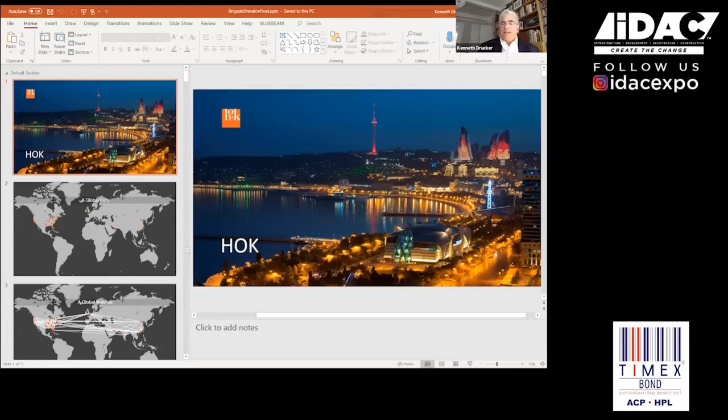So I've been traveling to India on and off for approximately 15 to 20 years, and it's been a fascinating experience for me in terms of understanding the culture. I love going to India, I love the smells, the fabric, the people, the textures of the cities, and creating architecture there. What's really fascinating to me is how the technology really hasn't caught up to what I would say other world-class countries have. So it's been very frustrating as a designer, because we have to actually design to what we think can be built in India.

Well, thank you very much for having me. I'm delighted to participate in this discussion about facades in India. I've been traveling to India for almost two decades, and I'm quite passionate about coming to the country. I love the people, the projects, the smells and the textiles, the sense of urbanity, and I find it a very friendly place to practice architecture. My relationship with India started with Jai Shankar at the Brigade Group, and since then I've been working with Hines, with the Chatterjee Group, with Adani, some projects with JP before they had those issues in Noida, and lots of different building types. We've been active in the transportation sector, and in residential, commercial, and retail in India for over 30 years.

So I'm going to share a presentation that briefly describes some of our projects in India, a great country, and then focus primarily on the Brigade project. Does that sound good?

Yeah, perfect, sounds great. So HOK has been around since 1955, and we're basically a virtual company at this point. I lead the practice in the New York studio, and we basically follow our clients all over the world. Right now our work in India is done primarily out of our London, New York, and Hong Kong offices.

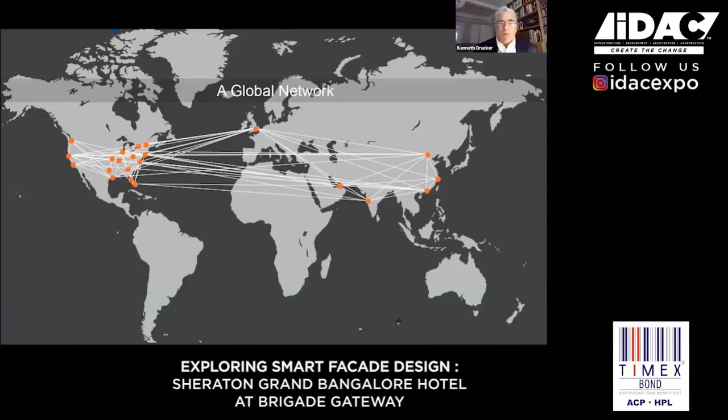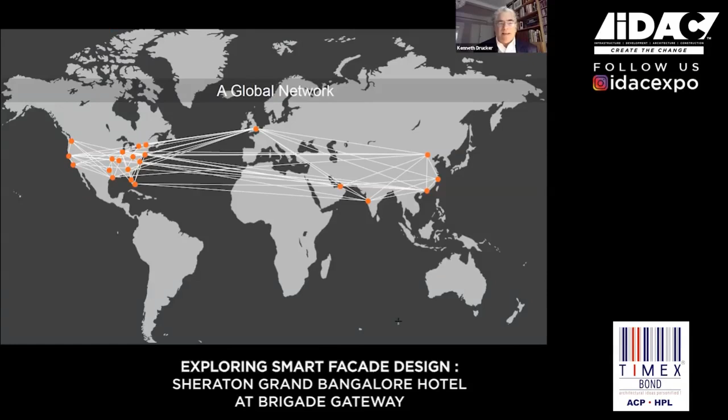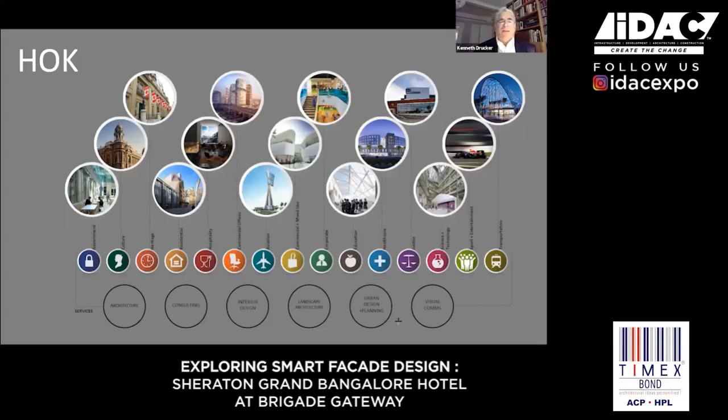We're a global practice. What we do is essentially have a network where we connect this practice together, and we fly all over the world doing our global projects. We pride ourselves on being both local and global. We have people on the ground in India who act as liaisons with our offices in identifying projects. We have many different project types, from architecture to consulting to interior design to landscape architecture, urban design, and visual communications. We have 24 offices all over the world.

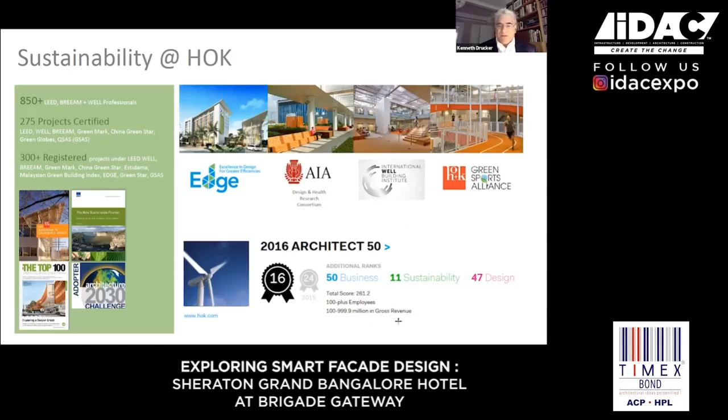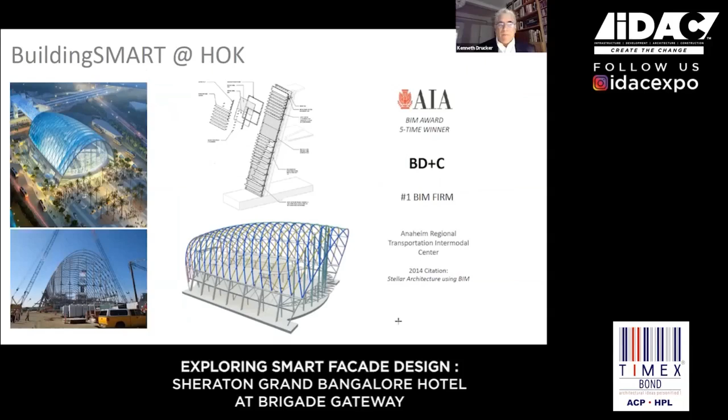What we pride ourselves on primarily is sustainability. We've won more Committee on the Environment Awards in sustainable design than any other firm in the world. It's part of our DNA. We start our projects from day one thinking about sustainability and the performance of our buildings, and we look to optimize that performance. We're also leaders in building smart in BIM, and a lot of our research has become textbooks in teaching Revit and building smart to the architectural community.

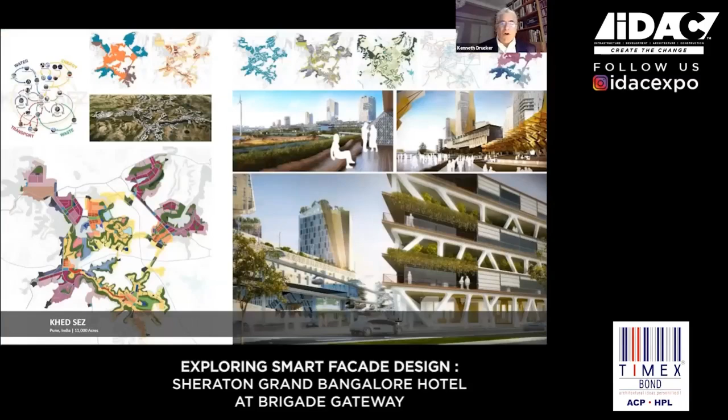As I mentioned, we've been in India for many years, starting primarily with our planning group over 30 years ago, including Lavasa Hilltown and Khed SEZ. We've done planning where we've tried to blur landscape and architecture using biomimicry, trying to understand the impact of wind and sun and the natural topography to develop our master plans.

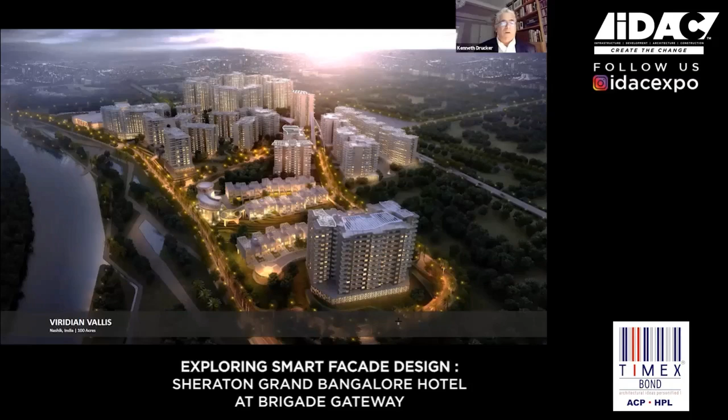We've also worked in Mahindra doing master planning, and here you can see Seawoods in Navi Mumbai. I've done projects in Bangalore, Gurgaon, and I currently have a project under construction in Chennai.

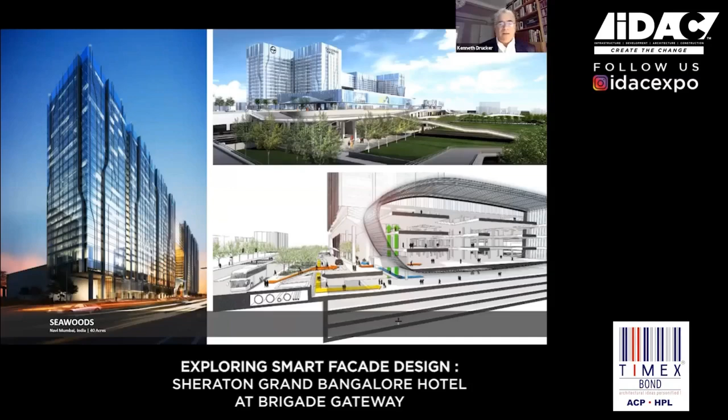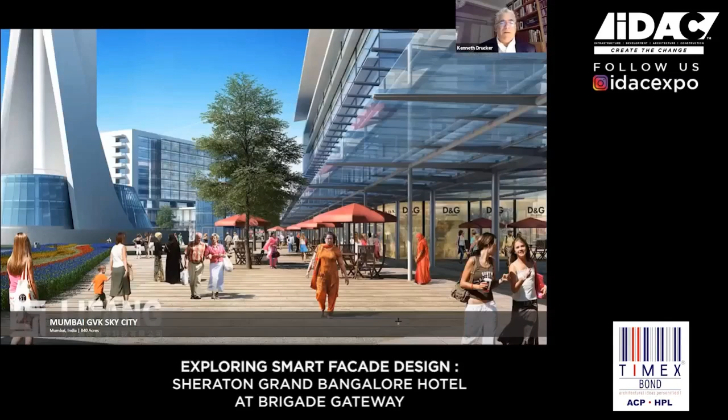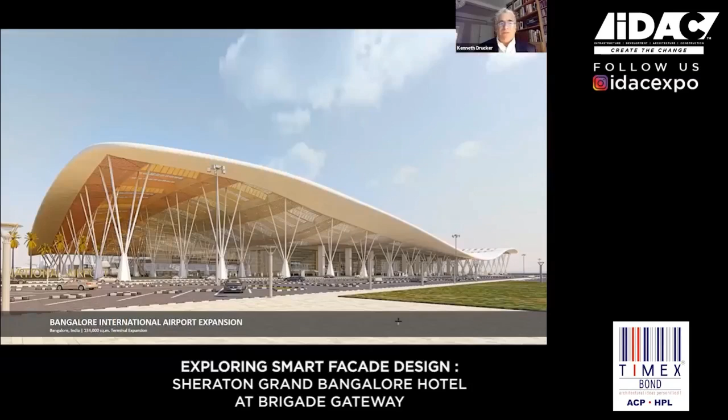One of the projects I'm most proud of is the project we did for Oberoi. What I like about working with Oberoi is that they really care about the quality of construction. This project started out as an office building and was then converted into a mixed-use building after the concrete shell was poured. It's an incredibly beautiful site, and I'm really proud of the craftsmanship and quality of this particular project.

You can see some of our master planning projects in Gurgaon and Delhi. This is a project we did for Hines, a study. Here we expressed our areas of refuge as major forms within the building. And then we do hospitality work.

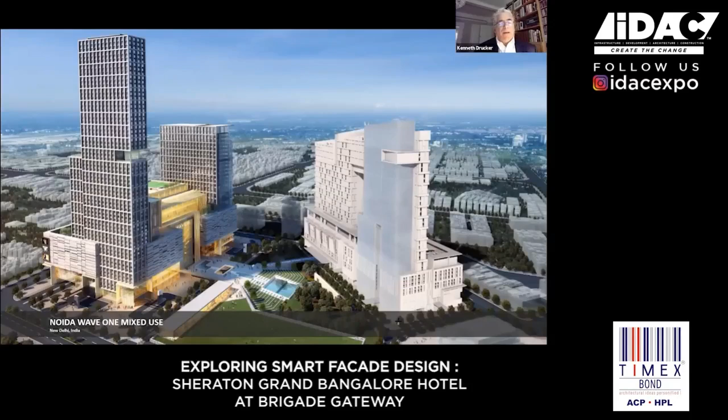Noida Wave 1 in New Delhi, Noida Wave 2, some of the interiors for Noida. In Bangalore, studies for the Conrad in Bangalore.

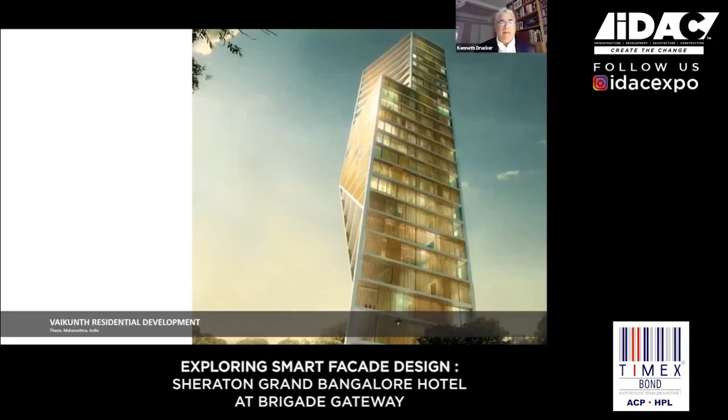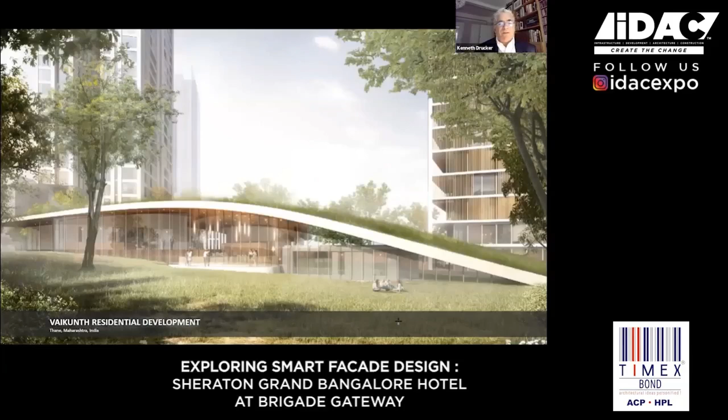Then some projects that represent sort of quintessential sustainable design, in that the buildings actually morph and can be customized based on the solar orientation of the building. This building has operable shades that sit on the concrete slabs, so you can adjust the building. What's great about this project is that it's formally very interesting, and it will have the personality of its occupants as you slide shutters back and forth between the slabs, and then of course there are community spaces within that project.

Similar project in Bangalore where we're looking at just articulating the unit types. In Gurgaon, we've done lots of different studies for this site for the Chatterjee Group, looking at whether it's all office or office and commercial. The building in the foreground is actually a solar-shaded facade on an office building.

We take a lot of pride in trying to understand the impact of designing in the heat and with all the dust one finds throughout India. This project in Chennai is under construction. It's topped out and the facade is going up. This is not far from downtown.

So let me focus a little bit on Gateway. Gateway was actually my first project in India. It started out as a master plan, a 40-acre site. Brigade was interested in creating mixed-use enclaves where people wouldn't have to spend so much time commuting from one use within the city to the next. Jai Shankar wanted to create a community that had housing, retail, commercial, hospitality, a hotel, a club, a school, and its own central plant, basically, so it could be completely self-sufficient and entirely off the grid.

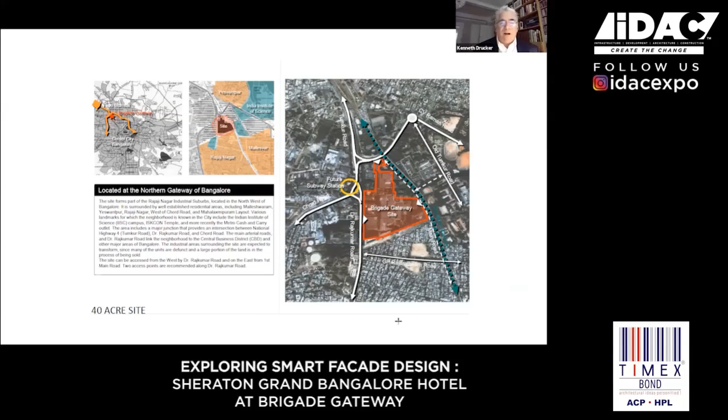So the focus today is going to be on the hotel, which is at the gateway and the entrance off of Dr. Rajkumar Road. Let me just go over the master plan quickly.

This was an industrial site, and we were asked to create what's now the Orion Mall, which has over 1 million footfalls per month prior to COVID. A hotel, which was a Sheraton very early on, was Brigade Group's first hospitality project. The World Trade Center itself was to be the tallest building in Bangalore. To the left of the tall building was to be a parking structure, and on the far left you can see a little wedge, which is the central plant. The hotel is just south of that T building.

We also needed to create play fields, a school, a club for the community, and about 3,000 housing units. So as design architects, we work in concept design, master planning, schematic design, and we always team up with the local architect.

For the tall building and for the housing, we teamed with Naresh Ventakaman, and for the hotel, we teamed with Abhay Zakaria, who used to work with me in the HOK New York office. We did this project together, and you'll see his firm's name in the title blocks later in the presentation. This was an old industrial site, a brownfield site.

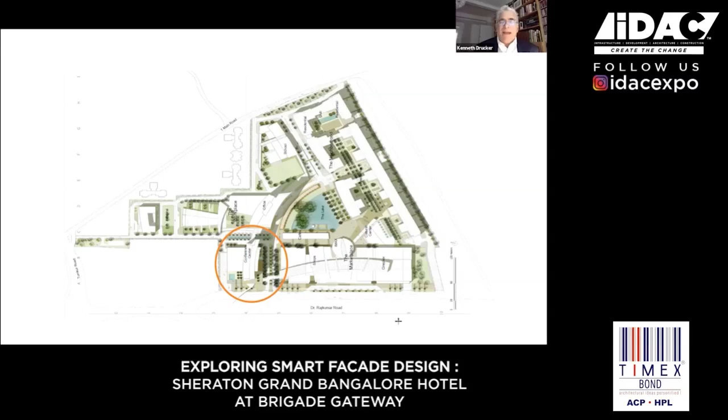We cleaned it up. We wanted water to be the feature, and we also wanted to restore and maintain as many of the heritage trees, the rain trees, that one would find on the site.

Early on, this is a concept drawing that shows the entrance off the main road. This is before Metro was installed, but we knew it was coming, so we knew the entrance was going to be over that roadway. Here you can see on the left the podium for the Sheraton, basically the glass wall. We wanted the Sheraton to be a cousin or companion piece to the office building, and everything was to be connected by bridges.

The hotel has its podium and pool, and the hotel itself is a bar building, a double loaded corridor. We wanted to create this nose of the building, this prow that you see on the left-hand side of the hotel, similar to the prow on this curved, tall commercial office building. We also wanted to shear the building in half so that the end view of the building as you're approaching the site would be slenderized, if you will.

And then you can see the Orion Mall, some earlier concepts for the skylight, and then the lake in the foreground. So that was the main entry piece as you come into Brigade.

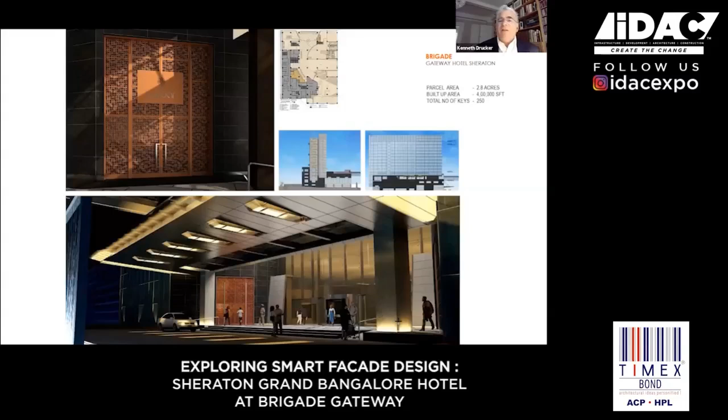The Sheraton itself is basically a concrete structure with metal trim that has an absolute black base with some horizontal metal reveals to create some sparkle. The glass, I believe, ended up being a stick system, not a unitized system. The north side of the building was a punched window wall system.

A view from the lake shows the Orion Mall on the left and the view of the Sheraton. The idea was to create a unitized system of chevrons, a sawtooth pattern, for the main office building.

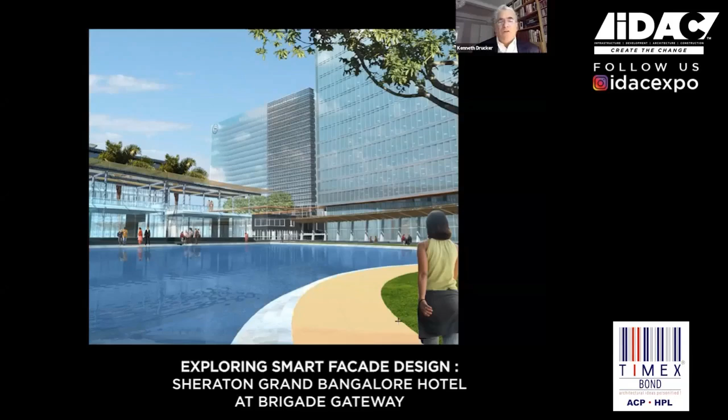I wanted to accentuate the corner of the Sheraton by creating horizontal louvers, creating sleeves through the exterior wall for structural support. The louvers became an issue, but about 1/3 of one end of the building ended up having horizontal shades, which also became a lighting piece visible from the lake.

As you move closer, you can see the bridges that connect everything together, and the dark gray stone plinth, if you will. We wanted everything to be heavily landscaped. You can see the notion of creating these louvers that are stacked on one side of the building.

On the north side of the building, we actually wanted to create a change of scale. I didn't want to do an entirely glass building, so the same absolute black granite goes up the side of the building. We created double height openings to deal with the scale of the openings, and some horizontal fins in a random pattern that created interest on that facade as well.

This is sort of the main view as one was approaching this site, and what you see here are the prows. What's interesting is when we started this project, we weren't required to put in areas of refuge.

You'll see in the final project that every 4 or 5 floors, we did have to add areas of refuge at the end of the building and also on the north side of the Sheraton Hotel itself.

These are some views from on top of the podium showing the curtain wall for the Sheraton itself and the horizontal louvers. You can see the primary joints, the vertical joints occur at the partitions for the hotel rooms themselves, so this follows the hotel room module.

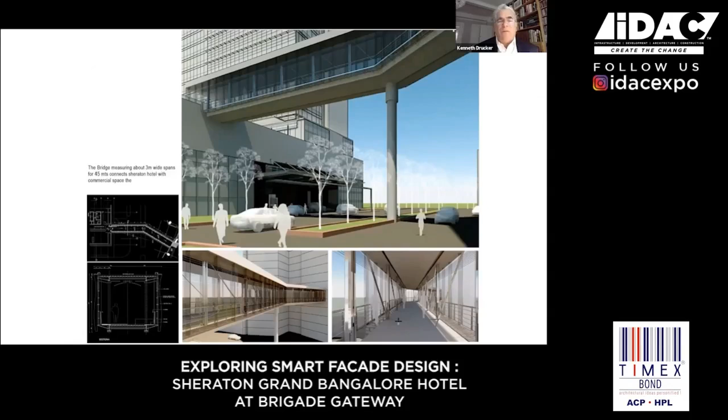These were just some studies of the bridge connection, connecting the commercial to the hospitality to the retail. It was very important for there to be a seamless protected covering, separating pedestrians from the traffic at grade.

And then as we develop the study models, you can begin to see the bridge, the main front door, the main entrance, and the canopy, some of the storefront for the retail at the base.

We wanted to create also a cantilevered screen wall around the mechanical penthouse at the top of the building. Here you can see the overall facade without the horizontal louvers, which we added after this model was complete. Abbe Zachariah became the architect of record and took our concept drawings, and we worked closely with Abbe to develop the facades.

I would say that most of the facades were done through a design assist method, working with the fabricator. The group was Facade India, led by Ravi, and the fabricator was SP Fabricators Private Limited.

What's in black is actually showing the spandrel glass versus the vision glass. So even though it appears to be an all glass facade, it is all glass, but it does have spandrel glass on the non-vision areas.

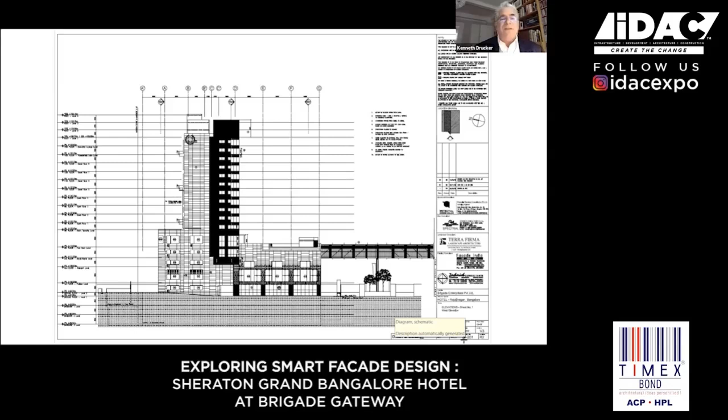On the north side, this ended up being where all of the mechanical ventilation occurs for garage exhaust and for kitchen exhaust. When you design a hotel, it's like designing a small city in that it's got its kitchens, it's got its loading, it's got its staff entries. This all happens on the north facade.

You can see the double height expression of floors, the ganging together of floors. And then we created this running bond pattern in the masonry on that particular facade.

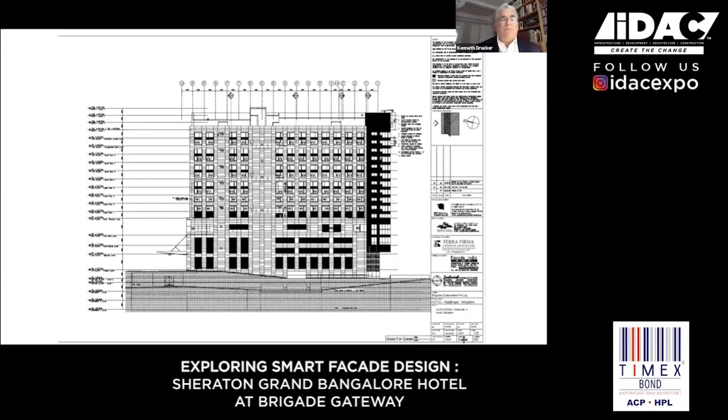And then Abbe did this drawing, which I know is pretty hard to see, but it's an unfolded drawing showing all sides of the building.

And what I found with the Korean curtain wall companies is that they were very, very precise, and we could pull off detailing like this.

Just like with the Sheraton, we had a public side, which was the glass curtain wall side for these projects. And then we had, in this case, a GFRC side with a running bond to allow us to meet the energy codes and have smaller glazed openings on the north side.

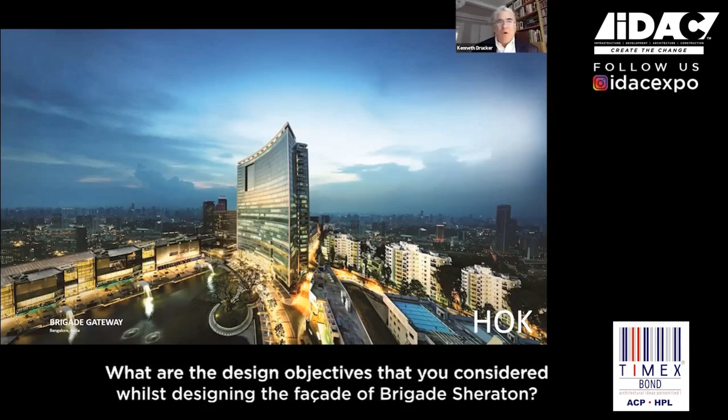A lot of clients, especially a decade ago, wanted floor-to-ceiling glass on all their projects, which is very difficult to do in a climate like India. Actually, after I did this glass tower, for both the Sheraton and the main commercial tower, I vowed to be more responsive to the environment, to look at more shading, to use less glass. So on the hotel itself, the building is half punched openings and solid, and half glass. I would work to use more or less glass moving forward.

If you look at the Habitat project, if you look at some of the other successful projects in India, I think they're more responsive to the environment than this. So that's what I've learned from this project: you need deeper facades, you need shading, you need to first orient the building so that passively you're controlling the solar exposure based on building orientation first. For a long building, you always want to make sure the short sides face east-west and the long sides face north-south, so you can control the south facade more.

Absolutely, so here it's actually reversed. The site planning is what dictated the tower placement, and so it's actually flipped. The glass should have been on the north side, and the punched opening should have been on the south side, but because of the importance of the entry into the site, I wasn't able to do that.

So, would you say that if you were to get higher performing materials—glass, for instance, very high performing glass that kept out heat—then the hesitation to use glass would reduce, I suppose, at the scale we use it in an environment like here, or another such environment somewhere else in the world.

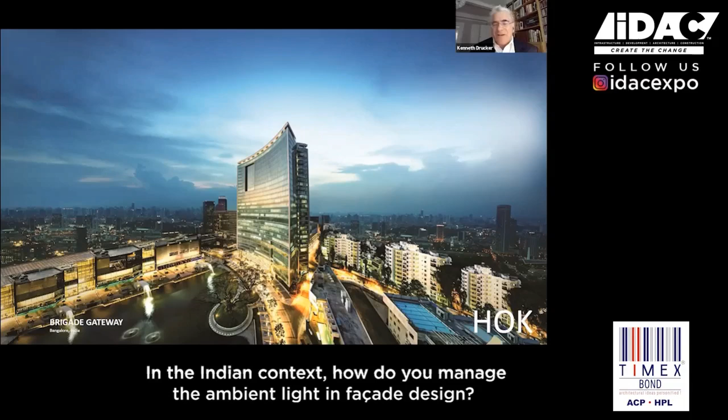When glare is an issue, we want to create either light shelves to bounce the light off. Here in the United States, we're adding frit for two reasons on the second surface - one is to prevent bird collisions, the other is to control the glare. So when a client wants floor-to-ceiling or sill-to-ceiling glass, we sometimes add frit to the buildings. But it's ironic - you do an all-glass building, you want daylight to penetrate the space, but then it creates heat gain, and it's really a discomfort to most occupants, especially with severe heat.

For the Brigade World Trade Center Chennai project, we actually have a variable system of external sunshades. They're vertical shades made out of metal, colored terracotta to deal with the color of Chennai. Basically, they're both to eliminate the radiant heat hitting the building - we've done studies optimizing the design to eliminate the radiant heat. It also eliminates the glare because most of the glass is in shadow most of the time.

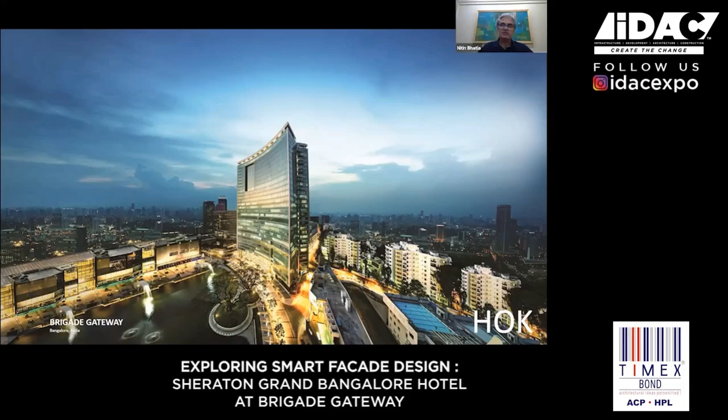Yeah, that works well. All right, let me jump to the next question. From a design and engineering perspective, how different is facade design in India versus that in the US, Southeast Asia, and the rest of the world? Given that you found difficulties achieving tolerances etc. in India at that earlier point in time, I don't know if you still face them on your project in Chennai, but it's great to learn.

I think it's less of an issue on a project 10 years later in Chennai. We have an excellent contractor - I mentioned the Oberoi project because of the quality of construction with Oberoi. I think it really depends on the quality of the contractor. But we rely a lot on visual mock-ups and performance mock-ups and testing. In the past, many clients haven't been willing to do that in India - there's a visual mock-up, but not necessarily a performance mock-up. We rely on those mock-ups in the United States and throughout Europe to test the facades and make sure we can improve all the seals, tolerances, and workmanship.

Sure. You'd be happy to know that at least on projects that Facet, my company, handles, visual mock-ups and performance mock-ups are mandatory, and we do that on every project with extremely tight tolerances, which would keep people like you and me happy when we go and inspect these facades.